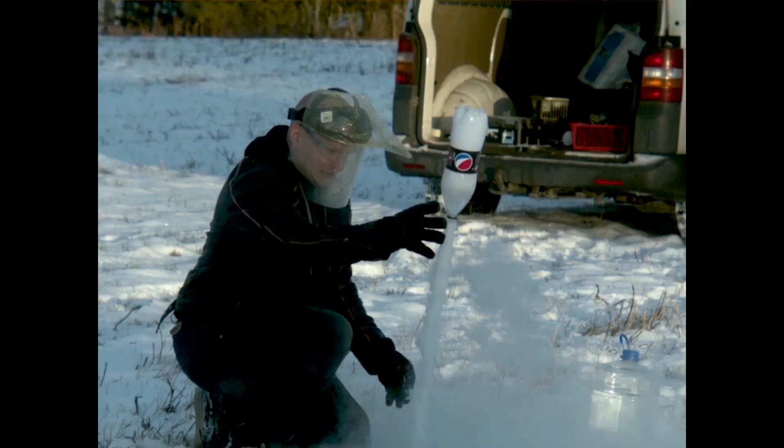Welcome to the Beyond the Press channel, and today we are going to show our new spinning top design. The original spinning top video is doing so great that I thought it would be a good idea to plan the bigger one today and make a short video about it.

So here it is. It has a modular structure, so you can change a lot of things on the spinning top without doing a completely new one, which is good because this is quite a big and time-consuming thing to do. And I can show some dimensions. I have here some drawings.

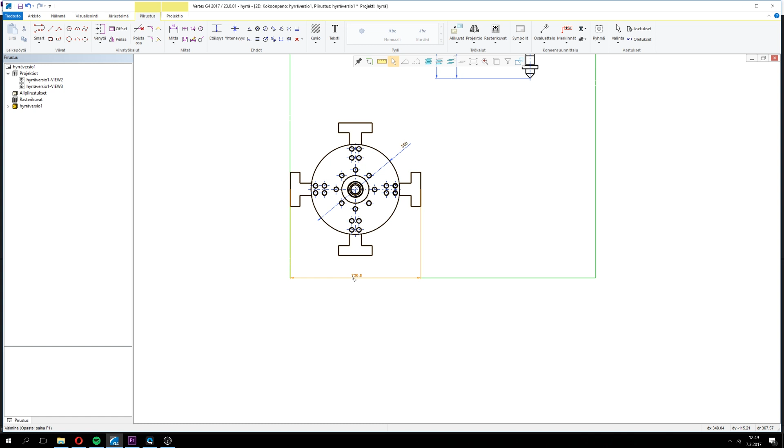So the total diameter with these blunt mayhem tools is about 75 centimeters, and the diameter of the disc is half a meter. So I think this is like 2 feet or something like that in American. And then the height of the mayhem tools from the ground is now about 20 centimeters.

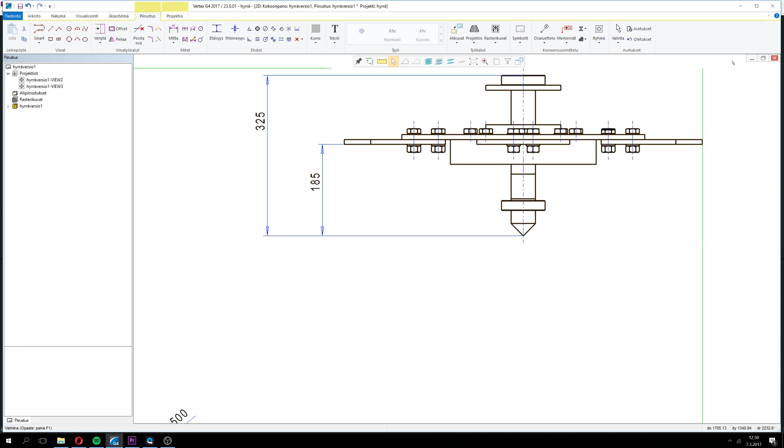But there is a modular structure on the lower part of the thing, so I can add these middle things here or remove them as I want. So if the things that I'm destroying are quite small, I can make this go quite low. And if I want to destroy something bigger, I can add more of these and then it's higher up. So I think it's good to have some versatility on this part. And then back to the 3D.

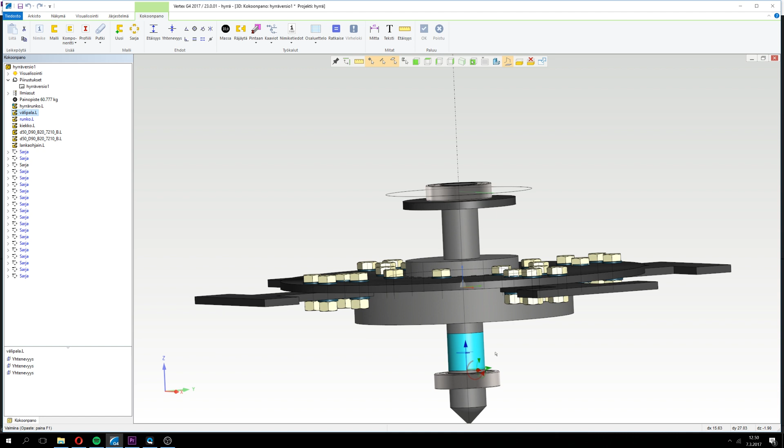So here you can see that this part here is machined. I'm going to do it myself with a lathe. And these are also here. This is the bottom part and this is the middle part that I can use to adjust the thing. And I'm going to mill some surfaces that I can use to tighten them up there with one screw. It's threaded.

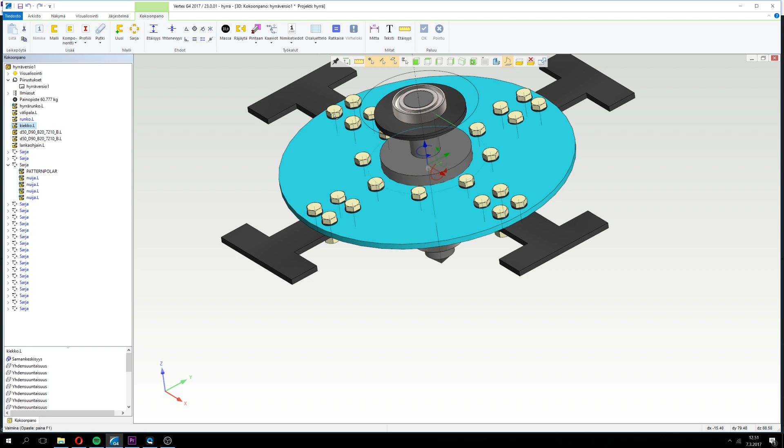And then I'm going to order these sheet metal parts from a local plasma cutter. They are going to have the holes ready made. Probably they are precise enough, because I'm going to put a bearing ball here to get a round surface. This sharp thing would be too sharp and it would destroy the surface that I'm going to have under this, or it would destroy itself.

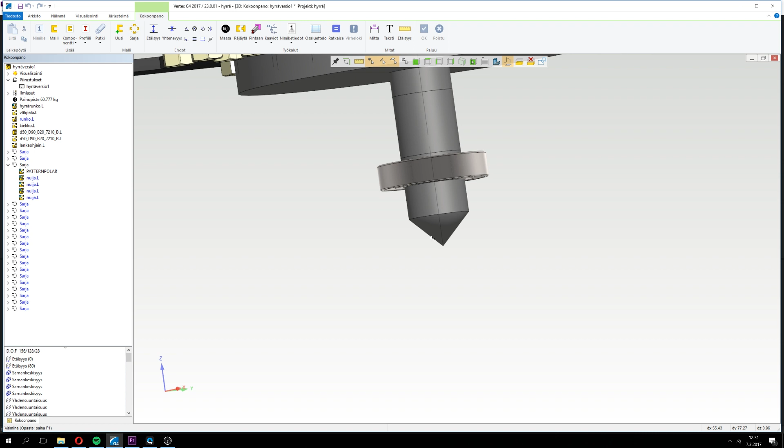So when using a bearing ball that has some surface to move, it doesn't matter if this isn't completely balanced. And if I want it to be, I can use my balancing machine to balance this. I have such a big balancing machine that I can balance this quite well. But I'm probably going to order the holes ready made here.

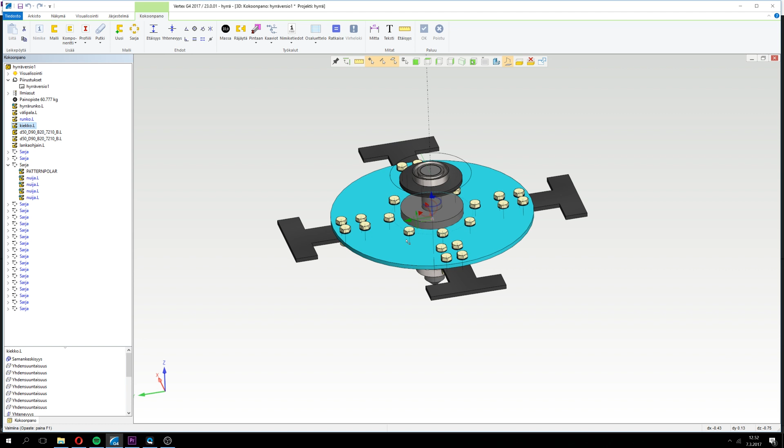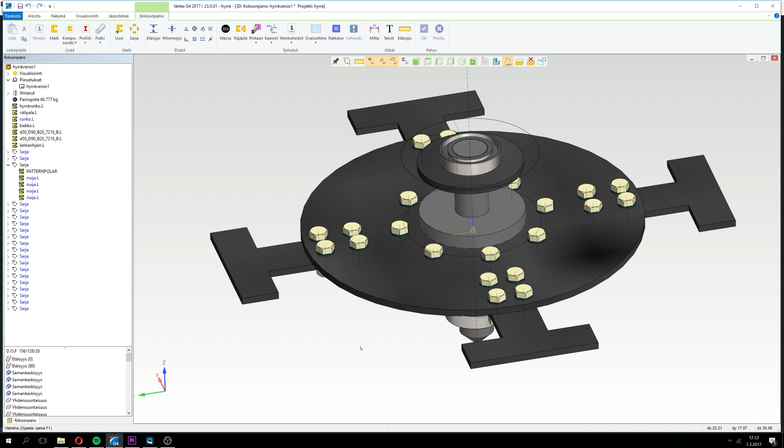So then I'm going to probably machine this hole right here, which is going to slide over this surface to make at least this round thing sit quite well in the middle. And maybe not this surface, it doesn't matter so much. Yeah, and the whole thing is kept together by these bolts. They are M16, I think it's strong enough.

I could use this software to calculate how much force these could take, but I think that isn't necessary. And it's also really hard to predict how hard these are going to hit, and it depends a lot on the stuff that I'm going to destroy. And if this fails, then I can just weld a shitload of welds here.

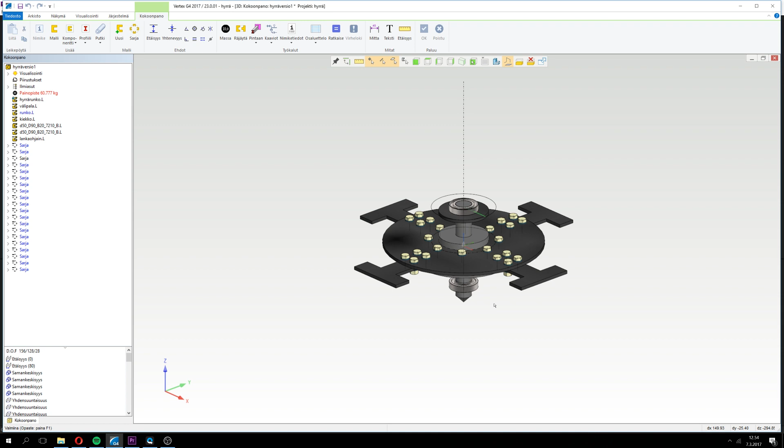This is much bigger than the old one, and because the diameter is so large, you cannot reach the middle thing to use a drill or some motor by yourself. And of course this is really dangerous. If that smaller one was a 2, this is a full 10. So I have to be like 100 meters away when this starts to spin.

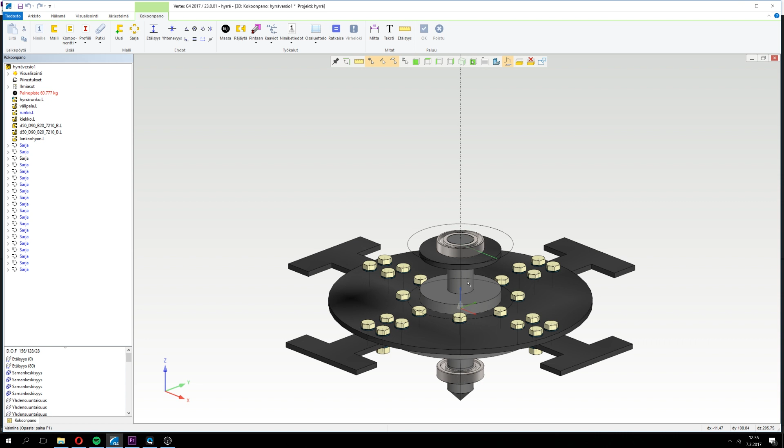So I'm going to have these ball bearings here, and I'm going to build a remote controlled launcher that is going to hold the thing in place from these outer rings, and then I'm going to have a rope or cable around here, and then I'm going to probably use a car to pull that cable out. With a car I have quite a lot of power.

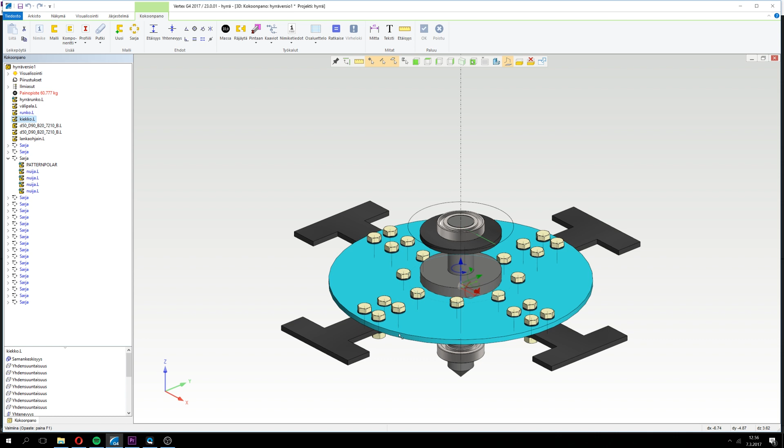I have a 200 horsepower 4-wheel drive van, which is going to pull really hard, and the car can go quite fast, and because this is 10 times smaller diameter than this here, if I drive 20 kilometers an hour, this diameter here is going to spin 200 kilometers an hour, and same thing if I go 60 kilometers an hour, then this is going to spin 600 kilometers an hour, so it's really good.

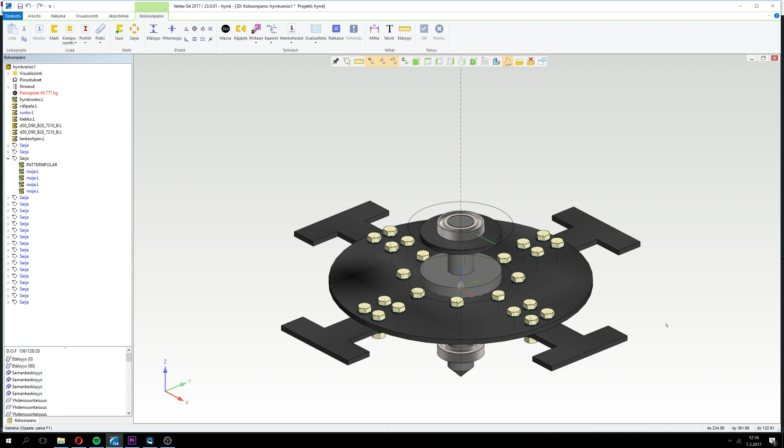And when the rope has run out, this just spins in the support thing, and then the remote control system will let it free, and then I have some kind of metal ramp that's going to allow the thing to spin down, and at the end of that ramp there is something that is going to have a really bad day.

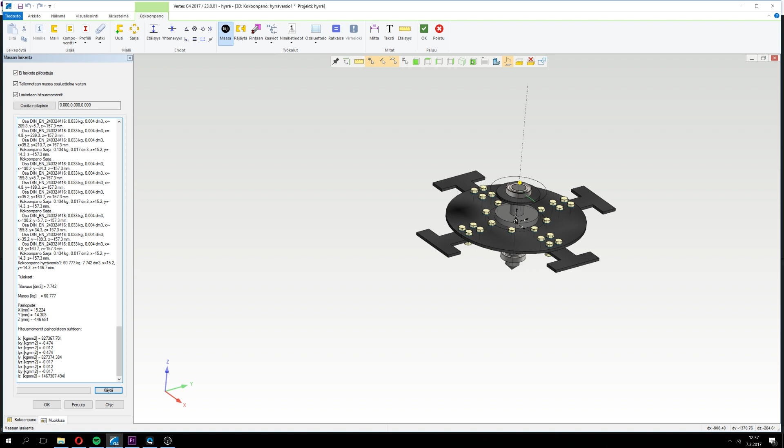Then the most important thing, how heavy it is. I calculate it right now. This calculates every bit and bob. So the total weight is 60 kilograms. So it's really heavy. And this also calculates how much energy it's going to store when it's spinning. So I'll make a quick calculation.

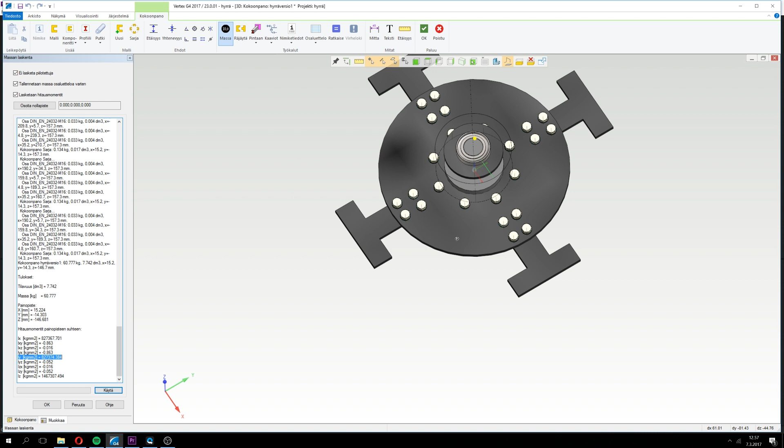Let's say that the car drives 40 kilometers an hour, and there is this 50 millimeter diameter thing here. So I'm going to use that data and calculate how much energy would be in this spinning thing. I made some unit changes and calculations, and I'm not sure if everything went right, but if the car goes 40 kilometers an hour, then the thing spins about 4,000 revolutions per minute, and that is 420 radians

per second. And here is the moment of inertia from the Vertex G4 that I used to draw the thing. So the energy in total would be about 73,000 joules, which is really a lot. If I remember correctly, a .308 rifle cartridge is about 2,000 or 3,000 joules. So this is a shitload of energy. So this is probably going to have enough speed and energy and everything.

The only thing left is to build this, and then the support and quick release mechanism. It's probably going to be harder to build than the spinning top itself, but I think this is probably the best and cheapest way to do this, because now I don't have to buy any motors or stuff like that.